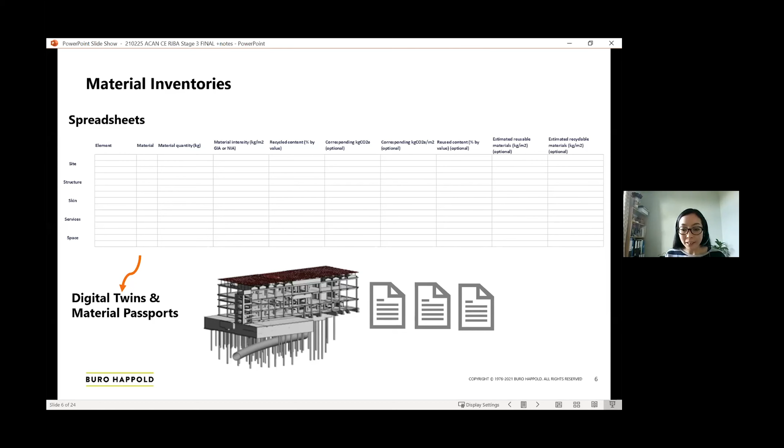It could be just on a spreadsheet. So here I've just got a quick snapshot of what you would capture for the GLA circular economy statements. But at the other end, there's a lot of discussions in the industry at the moment around creating digital twins and using them as a basis for capturing your material passports. So yeah, watch this space. I think eventually that's where we will move to.

In between, at BuroHappold, we started using the One Click LCA Building Circularity Index tool. So this is a bit of a plugin into the One Click LCA software that we use to do our life cycle assessments. And this software basically captures some additional information about the materials being brought into your building. So is it regenerative? Is it recycled? Have you reused it in situ or from elsewhere?

And then it gets the team thinking about what happens to your materials at the end of life. So it's forcing that discussion now, line by line, to say, okay, you brought this material in, what's going to happen to it? Is it something the manufacturer can take back, or something that you can design for adaptability or recovery at the end of life? And overall, the software creates this circularity index, so you can start to benchmark across your projects.

But there's a lot of discussions over whether more aggregate metrics or this kind of overall metrics is important. But I think the key message is really to start measuring something, and then you can start to understand where the issues are.

So as mentioned, this circularity tool is basically building on the life cycle assessment model. So if you were doing a detailed LCA model, you'd be capturing a lot of information about the material quantities anyway, and hopefully might be pegging it to environmental product declarations to understand exactly what these components' impacts are. And the building circularity tool basically allows you to just add another layer of information around its recycled content, whether it can be designed for disassembly or adaptability throughout its life, or what happens to it at the end of life.

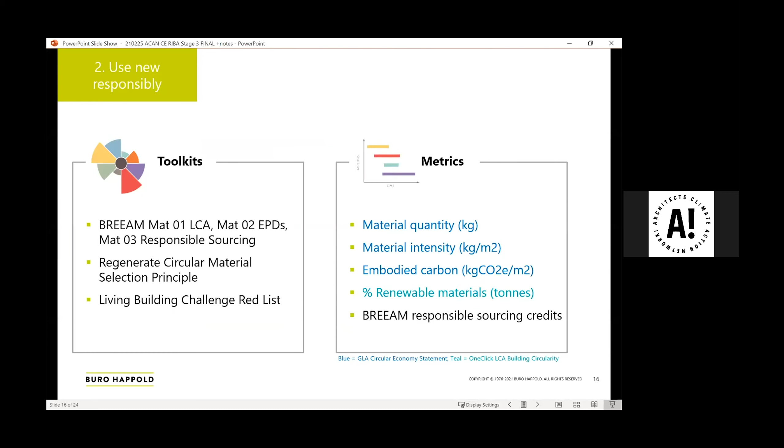In terms of using new responsibly toolkits, again, the BREEAM, you're probably all familiar with, there's lots of credits around measuring the responsible sourcing and the embodied carbon. The Regenerate tool has some great references as well. And then in terms of that healthy material piece of using new responsibly, the Living Building Challenge certification scheme has a great section on what they call red list materials, so materials that we should try and avoid on our projects.

And in terms of metrics, the Circular Economy statements for the GLA look at total material quantities of different material types. Interestingly, they started looking at material intensity as well, so we can start to create benchmarks and get a feel for whether the building you've designed has got too much material in compared to other things. And the One Click LCA looks at percentage renewable materials as well, so encouraging the use of things like wood, hemp, etc.

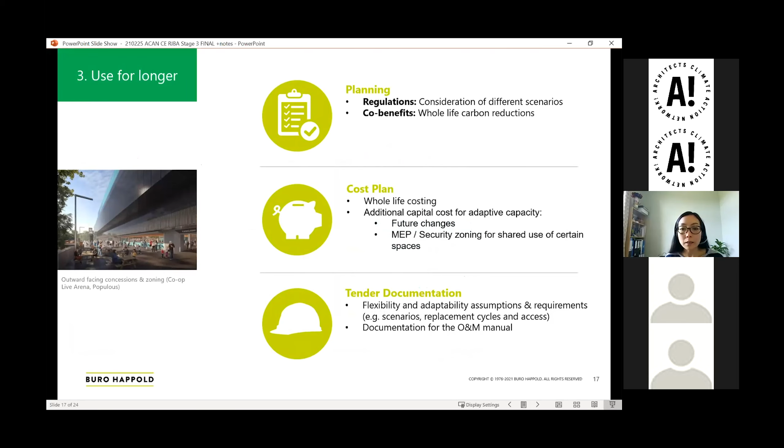Using for longer. So I suppose this probably has less planning impacts. It's less visual, but more about the scenario planning and the organization of your materials and your space and the narrative that you play back to the planners and to the client and to the contractor. I think a couple of things on cost plan. Sometimes when you're looking at adaptive capacity and future changes, it might lead you down the route of looking at how you zone your spaces up for shared use so that you can increase the utilization on your project a lot more.

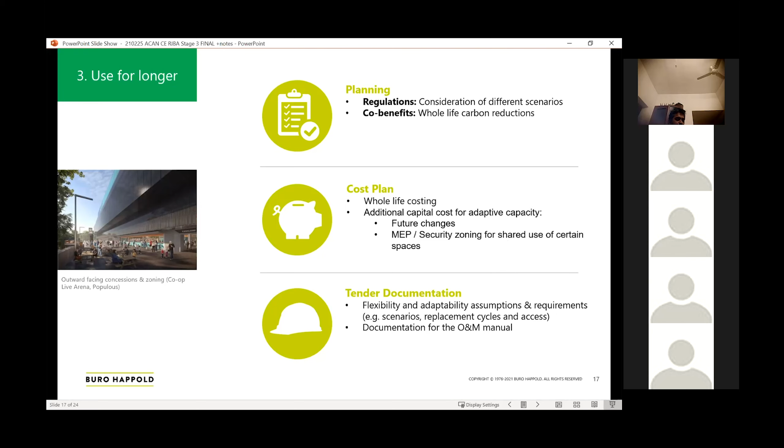And this is an example on the Co-op Live Arena that we're working on up in Manchester at the moment, where the discussions were on non-event days. Quite often arenas stand empty, but how can we zone it up in such a way that you could use smaller pockets of it? And how could you potentially have some of the concessions facing outwards on non-event days so that they're available for community use rather than just boarded up when it's closed.

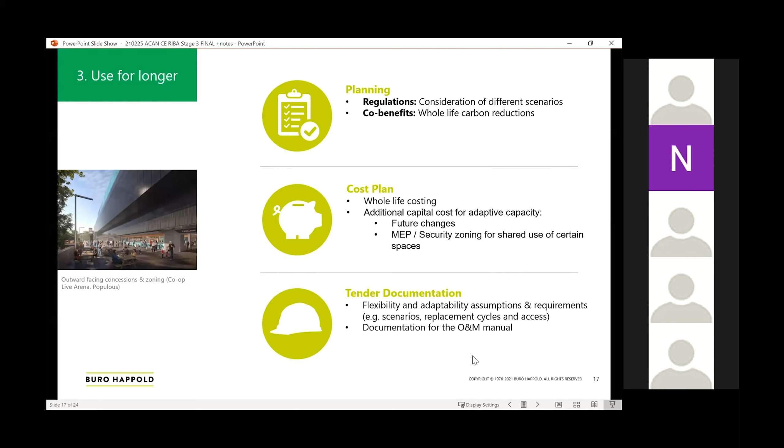And then in terms of tender documentation, it's important to get your assumptions around flexibility and adaptability across to the contractor so that when you start to engage in value engineering, the dreaded two words of every design team, but inevitable on a project, we know what we need to protect. So if things come out, they might fundamentally change the adaptability opportunities for the project. So it's quite important to communicate that across.

And in terms of toolkits, again, quite a few things in BuroHappold that you can dive into a little bit more. The Regenerate tool has the design for adaptability principle, which has a lot of case studies you can pick up. And then in terms of metrics, this is probably an interesting area that a lot of people are head scratching around at the moment. Within the GLA, it's very much about the narrative of how you approach this. Within One Click, they are starting to look at whether you could capture the percentage of materials that you could design for adaptability.

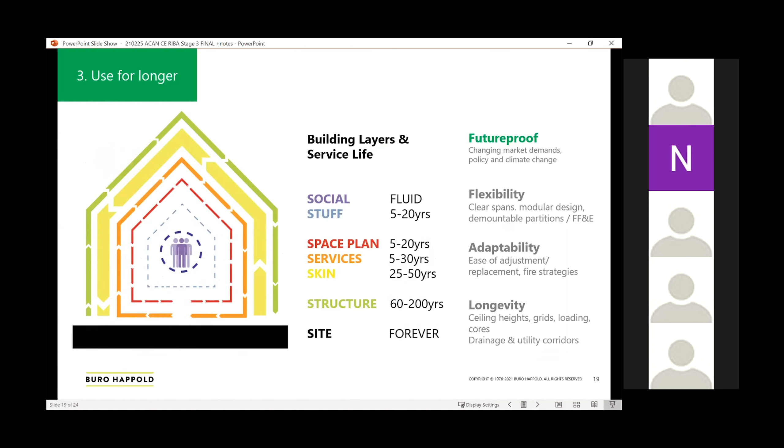But yeah, very much an area that is in progress at the moment. And then obviously the longer-use piece: if you're looking at adaptability and flexibility, it's very important, as previous speakers have said, to look at building layers and the service life of each of these areas, so that your future-proofing strategy is tailored to how long that item is going to be there for.

And finally, from a planning perspective, this is very welcome forward thinking by planners. So I think capturing that in the sustainability narrative is quite a good planning win for teams, so make sure that's very strong.

If part of your reuse strategy is looking at products as a service, make sure that agreements and the contractual responsibility splits are captured in your cost plan and your tender documentation. And make clear that the contractor will also have to capture additional things within the O&M manuals that they hand across to the client, so that the client will understand how the design intent has been put in place for disassembly and recovering the materials at the end of its life.

In terms of toolkits, BuroHappold Regenerate has got some useful information you can dive into, and for metrics, as I mentioned before, on the One Click tool you can capture percentage in tonnage of reuse, recycled, and downcycling. The circular economy statement looks at very similar metrics, but in kilograms per meter squared, so you can start to capture data and create benchmarks.

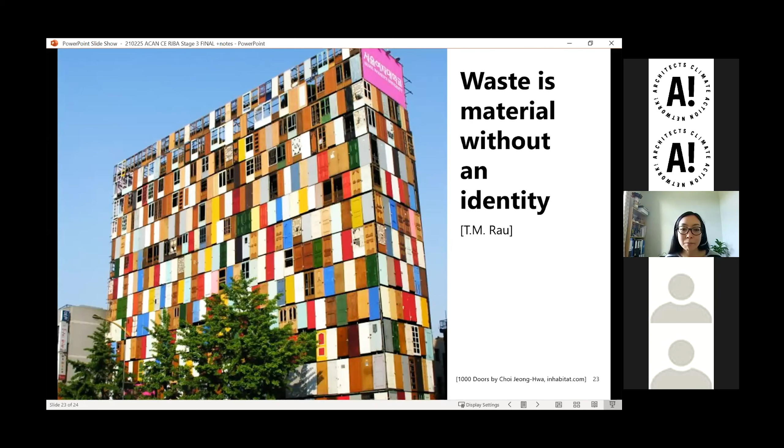And a final parting thought I wanted to leave you with is one of my favourite quotes from Thomas Rau, who's very much a pioneering circular economy architect in the Netherlands. He said that waste is basically material without an identity. So I think the challenge goes out to everyone on the call and the industry: it's up to us as professionals to be creative and rethink and repurpose materials so that waste doesn't have to exist. Everything can be used as a resource.

So that was a very whistle-stop tour through stage 3. Any thoughts? I always love to chat about circular economy. So thank you for listening.

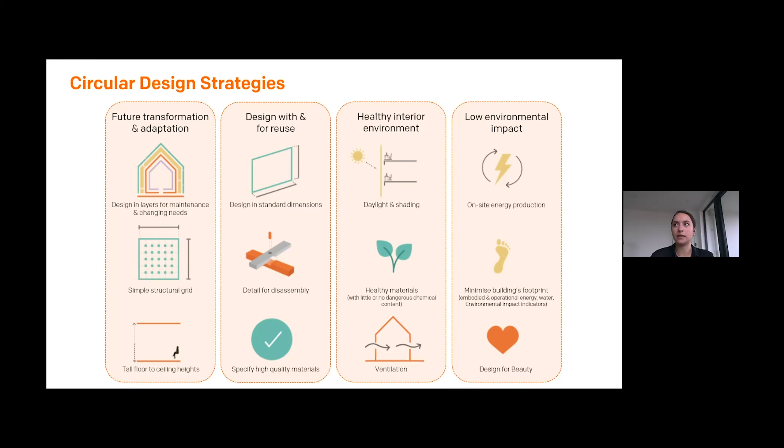Based on my earlier work, I've also identified 4 main strategies relating to the circular economy. These overlap with the themes identified with the UK GBC in their Circular Economy report. The main strategies are future transformation adaptation, design with and for reuse, healthy interior environments to promote well-being, and low environmental impact. Under each of these, you can find 3 sub-strategies, including designing in layers, designing in standard dimensions, detailing for disassembly, specifying healthy materials, and minimizing a building's footprint using all environmental impact indicators.

So today I'll discuss the Morden Wharf project, where Chetwoods was appointed by U+I to develop the commercial element on a strategic industrial location that houses the former Tate & Lyle Sweeteners refinery. The challenge here was to provide a viable industrial solution that allows optimum flexibility while being bold with the design approach to create a cohesive community with the neighboring residential development. A variety of buildings have been proposed that include the conversion of an existing building that engages with the public realm, a new build warehouse for larger single operator, a business incubator for small mid-sized enterprises, and a makerspace facility for small creative industrial businesses, while creating a vibrant gateway to the development.

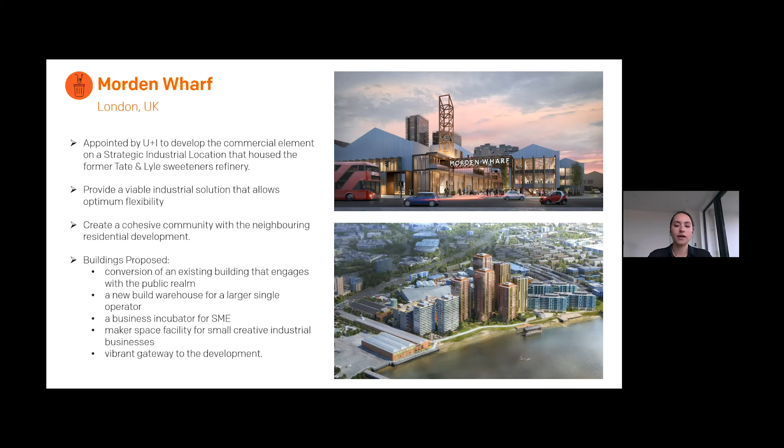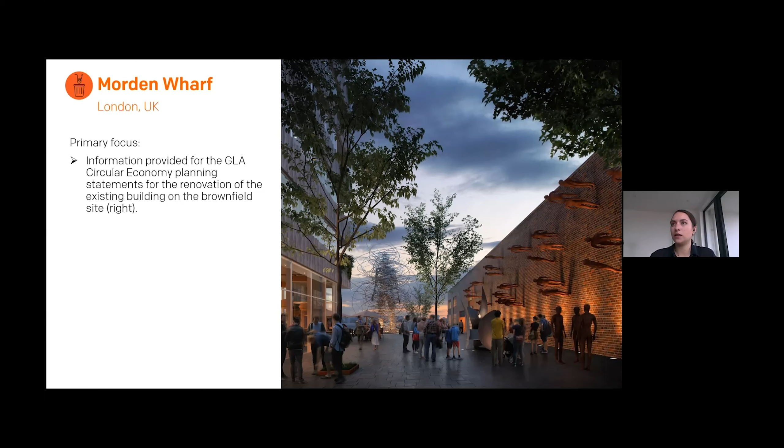The overall site will be redeveloped as a 178,000 square meter mixed use scheme, expected to deliver 1,505 homes with 35% affordable and a large riverfront park in addition to the industrial element. The project is currently in for planning. The primary focus today is to explain the scope of information provided in 2 stages of statements to the Greater London Authority Planning Office for this project, including the overall circular economy strategies and commitments. These statements were submitted at the RIBA stages 0 to 1 and 2 to 3 respectively for developments on the existing brownfield site and the alterations to the existing building, the facade of which can be seen here to the right.

The Greater London Authority now requires that a circular economy statement be provided for referable applications at planning submissions. This is part of the London Plan Policy SI7, reducing waste and supporting the circular economy. There are 3 stages of statements to be delivered.

First, the draft or outline statement, which is produced during RIBA stages 0 to 1. Secondly, the detailed statement at the full planning application during RIBA stages 2 to 3. And thirdly, the planning updates and post-completion updates undertaken during RIBA stages 4 to 7.

The Morden Wharf project qualifies as a referable application due to the number of residential units as well as the height of the residential unit. Chetwoods provided input for both the outline and detailed statements for the commercial buildings, while OMA contributed on the new residential buildings. And the process of collating the circular economy statement strategies and commitments was undertaken by the Morden Wharf engineers, Ramboll, for submission to planning.

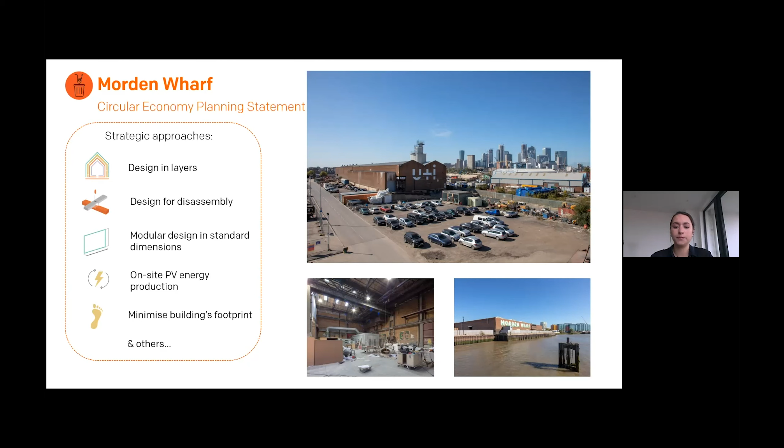Strategic approaches for the renovation include providing ease of access to promote regular maintenance, all new components being designed for future disassembly and component reuse, including bolted steel structural elements, specification of standard non-specialized dimensions for future potential uses, on-site energy production with roof-mounted PVs, and utilizing sustainable resourcing policies and sourcing materials from within a reasonable radius to the project, contributing to reducing the building's embodied energy.

The detailed circular economy statement was significantly more involved than the outline statement, as it required that we consider metrics that we would not typically have at this early stage. In response to the GLA request, Ramboll actually provided a tool for us based on the required tables from the GLA statement guidance, which we then populated. And these included a bill of materials, recycling and waste strategies, end-of-life strategies, and metrics.

We're doing a fairly light touch on this project, so at the moment, the main space is programmed for a brewery with a tap room and beer brewing uses, and therefore has minimal material calculations as the use remains fairly raw and industrial. However, it did require us to both review environmental product declarations, also known as EPDs, of relevant materials, as well as reaching out to manufacturers to inquire about materials' embodied carbon and material content if no EPD was already listed. Ahead of quantifying the new materials in the building, we had commissioned a point cloud survey, which was crucial in providing accurate material takeoffs.

When filling out the bill of materials, we considered the material intensities for new materials to be installed in the existing building, as well as their end-of-use strategies. This was difficult for stage 3, as not all of the materials had yet been specified, but the spatial planning was complete. So in order to report the material intensities, we found the areas of materials, as well as sourced the weight of the materials from the EPDs or other available material data from the manufacturers. Material quantity was quantified by weight in kilos, as Georgina mentioned earlier, and the material intensity was then found by dividing the weight of each respective material by its area according to the model.

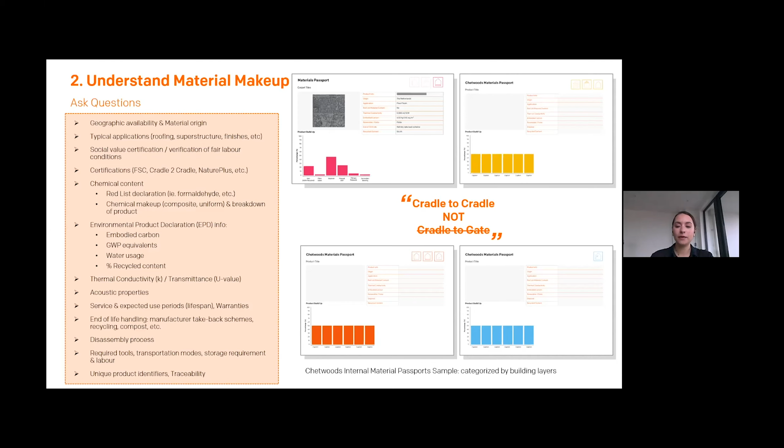And from this, we created our own internal material passports organized by building layer, where this information is required as part of the detailed circular economy statement, bill of materials, and end-of-life strategy tables. And drawing upon our 6 R's that I started off the presentation with, we know that using virgin materials is not the best option, and we should look to materials already in circulation, such as those found in the existing building cadastre, thereby reducing further emissions and demand for virgin materials.

The third takeaway is that we should look to identify locally available materials by creating a local resourcing map. Identify sources of salvage and secondhand materials to be applied in new construction and renovation. If no appropriate salvage materials are available, the scope of the search can be widened to include materials with recycled content and locally sourced bio-based products.

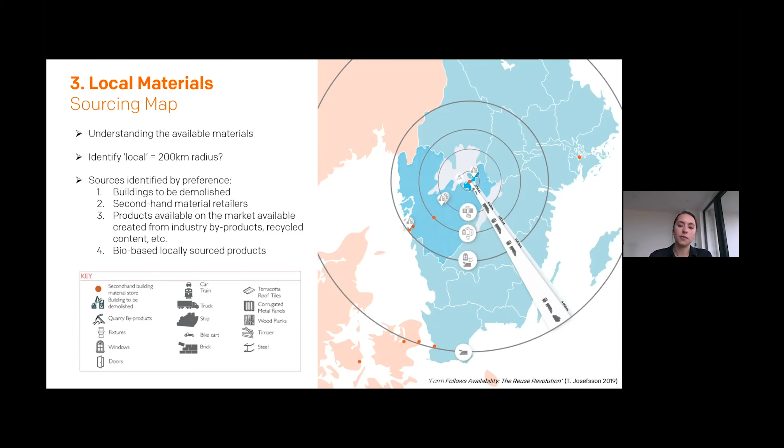In order of selection preference, relating back to our resource hierarchy of the 6 R's, first priority should be given to buildings to be demolished in the near future so that materials never have a chance to enter the waste stream. Secondly, select materials available at secondhand building material retailers. Thirdly, products available on the market from industry byproducts, post-recycling and post-consumer. And fourth, bio-based locally sourced products. Of course, you need to consider the trade-offs. For example, British steel is higher in embodied carbon than some of its European counterparts, and that's due to differences in production processes.

Takeaway 4 is mining of existing buildings. When auditing existing buildings for materials, make sure the quality of data is good. On a project we did have a point cloud survey done, but by the time it stretched the full length of the building, the dimensions were not accurate.

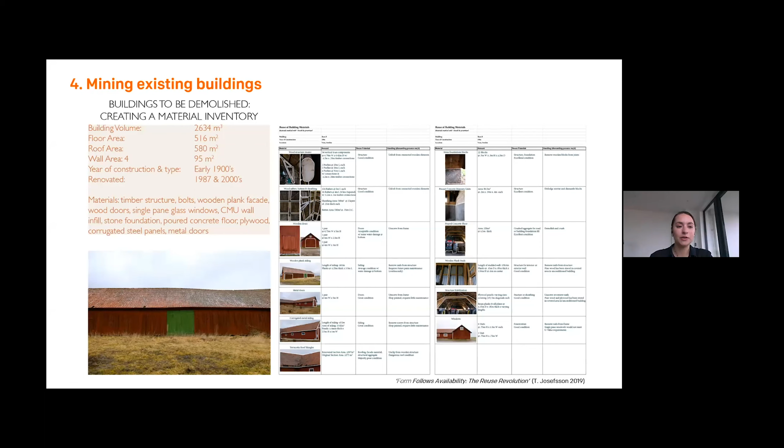Here I've shown an example of what an audit might look like, including information on quantities, quality, reuse potential, and disassembly methods. This example was taken from my research in Sweden, where I visited a number of underutilized barns to create a series of material audits, where I quantified and qualified their existing material stocks. And after the initial building survey, I recreated the buildings in Rhino to get material takeoffs and create a catalog from which to shop for a new office proposal utilizing over 80% reused materials.

And finally, to ensure that any good done in the design stages is carried forward in the future, tracking materials in their future journey is important. Material passport data integrated into BIM models can help track these new and reused materials and components in existing and new construction with a digital thread. With this thread, each item can be easily identified with the associated material characteristics and asset history integrated in the software, making tracking materials and buildings simple.

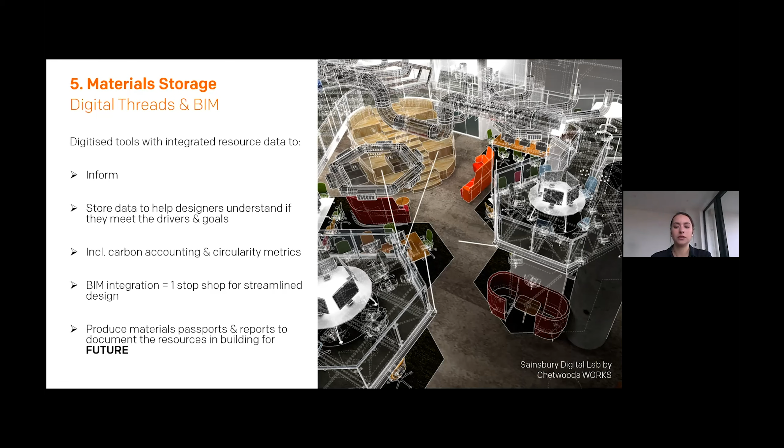So to do this correctly, we should emulate what the more advanced sectors are actually doing now, such as car manufacturers, making investments into digital twins, aka intangible assets, to eliminate resource waste of the tangible assets. Making this material data and creating BIM models should be done at all stages of the design process, including stage 3. But not only does a BIM model help to inform the embodied and operational carbon, it can also provide circularity metrics for early design analysis through to stage 4, aiding the architect in making fully informed decisions at all stages of work.